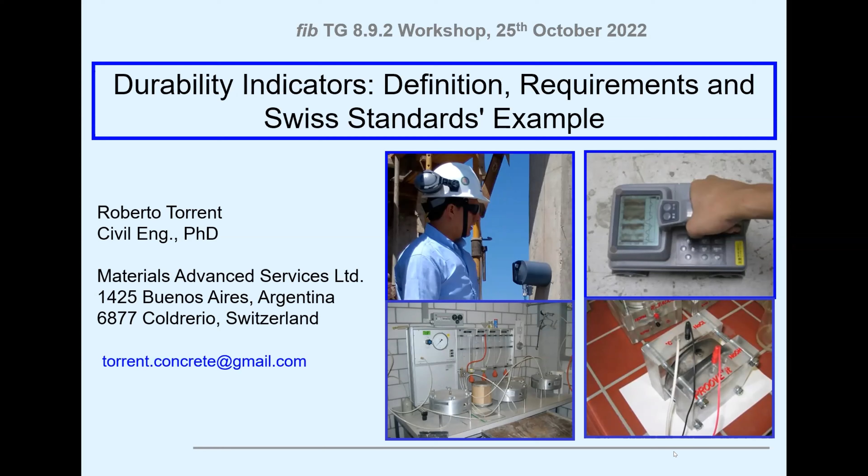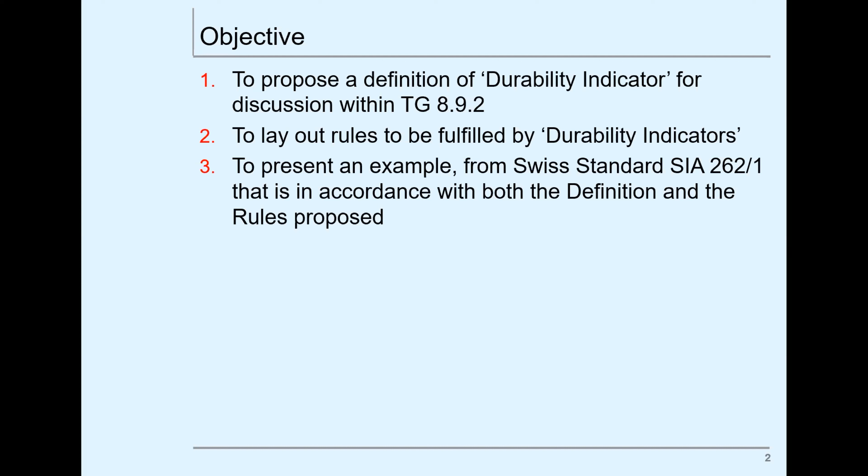The objective of the presentation is to propose a definition of a durability indicator that would be a contribution for discussion within the committee. Also, to establish some rules to be fulfilled by durability indicators, particularly where they are considered as performance indicators. And then I will show the example of the Swiss standard that, somehow by chance, complies with these rules that I mentioned.

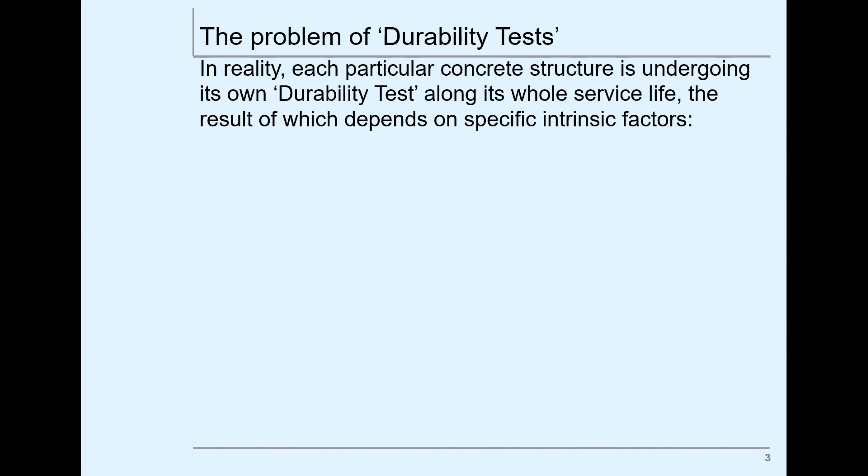I will jump this first slide because we all know that each structure is running its own durability test live during its service life, and there are many factors that affect the performance of the structure. So the conclusion we can all agree on, I think, is that it is unlikely or impossible to get a durability test that condenses all these factors.

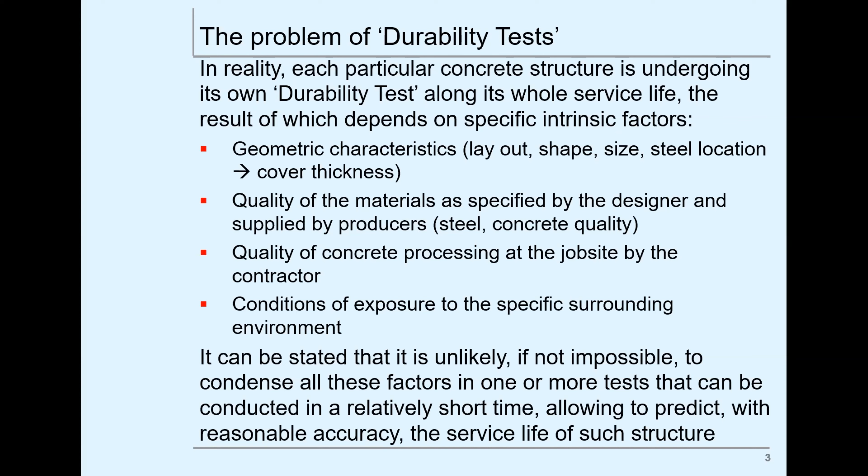But we also know that for degradation processes that depend on the penetration of aggressive agents like CO2, chlorides, and sulfate ions, etc., that have to penetrate through the surface layers of the concrete, it is generally accepted that tests measuring the penetrability of those layers are suitable as durability indicators for these particular mechanisms.

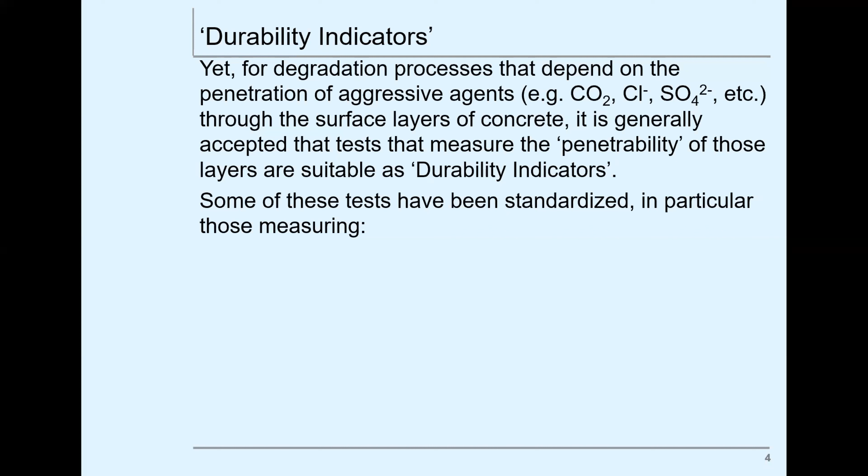We know that there are many tests that have been standardized, particularly those measuring permeability, water sorptivity, water penetration under pressure, gas permeability, and diffusion or migration - like chloride diffusion, chloride migration, electrical resistivity, gas diffusion, or carbonation rate, which includes not only diffusion but also chemical reactions.

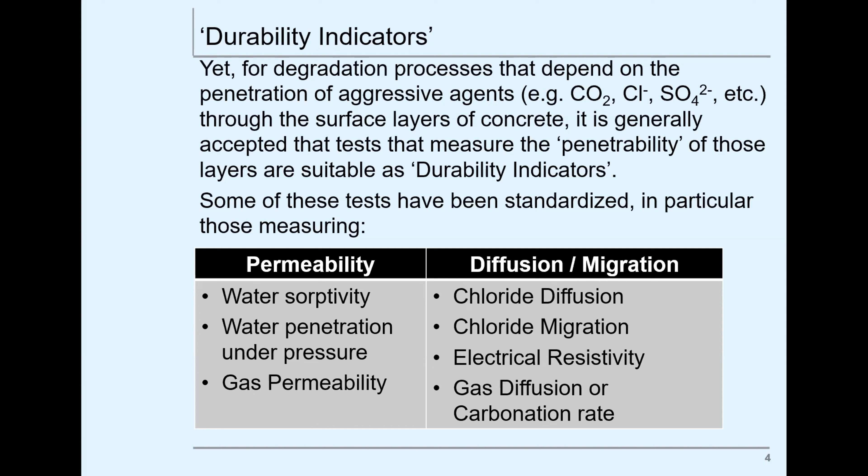Now I will try to advance - of course this has to be discussed deeply in the group - a definition of a durability indicator, thinking of these particular mechanisms. We can say that durability indicators are characteristics of the concrete structure, like the cover thickness, or of material properties of the concrete, that are essential to or bear a significant role in the service life of a structure under its specific exposure conditions.

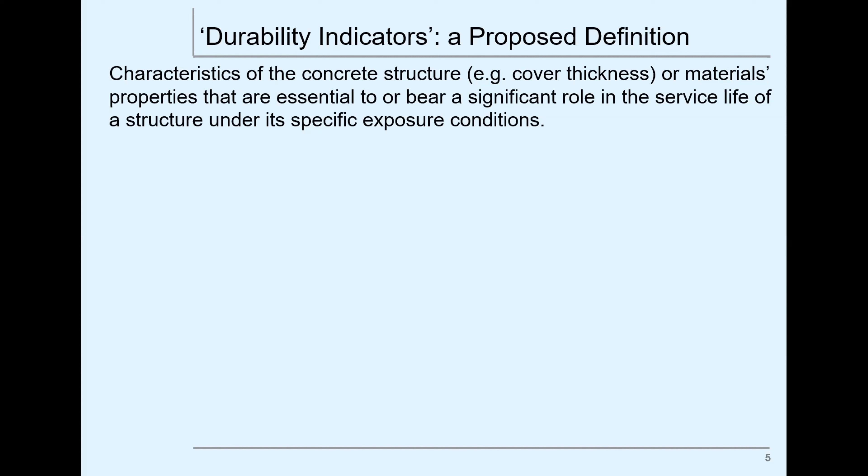Incidentally, this definition was coined during a meeting. I think Jost was present. I don't know, Carmen, if you were there. It was a meeting in Leipzig that was organized by Professor Dehn and Professor Beushausen, actually on a similar topic.

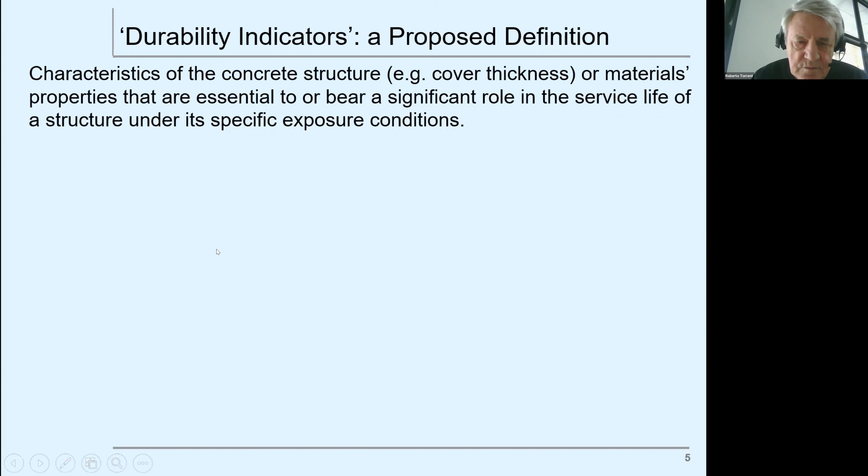We can say also that durability indicators should first be meaningful - that is, it should be closely connected with the relevant physical, chemical, and/or electrochemical deterioration mechanisms that govern the performance of the structure. Second, they must be measurable, preferably in a reasonably short time, through well-defined, standardized methods of test or analysis.

And third, it should allow conformity assessment with specified requirements based on tests conducted at suitable, well-defined sampling points - it could be the production plant, the delivery point of the concrete, the placement point, in situ on the finished structure, or in service if some years have passed since the structure was built.

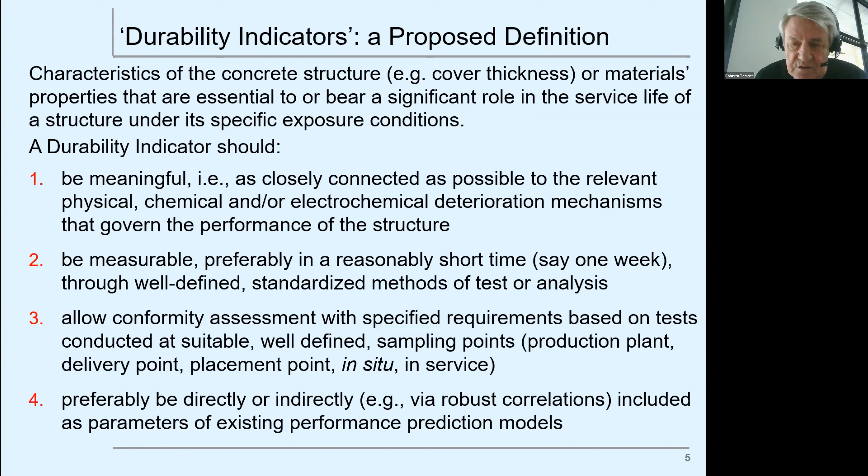And preferably be linked to some modeling, directly or indirectly, via robust correlations with other properties.

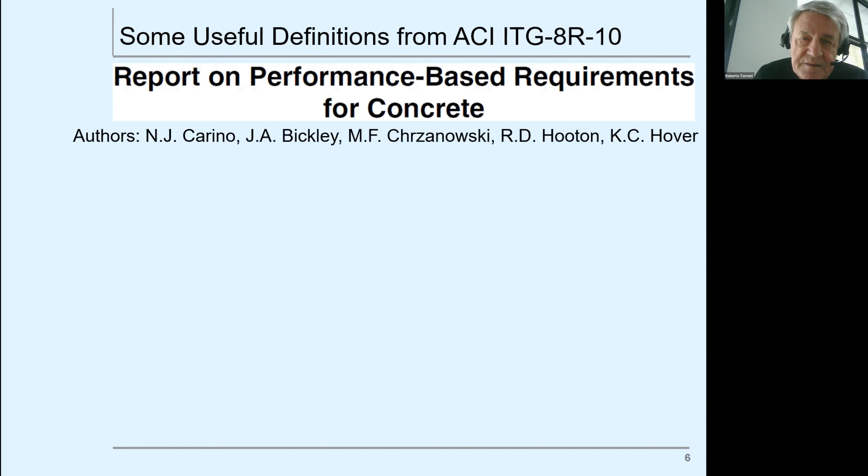Now I want to refer to a document which I find interesting for our work, which is a report on performance-based requirements for concrete. You know the authors, some names we know well, that provide some definitions, of which I took only a few.

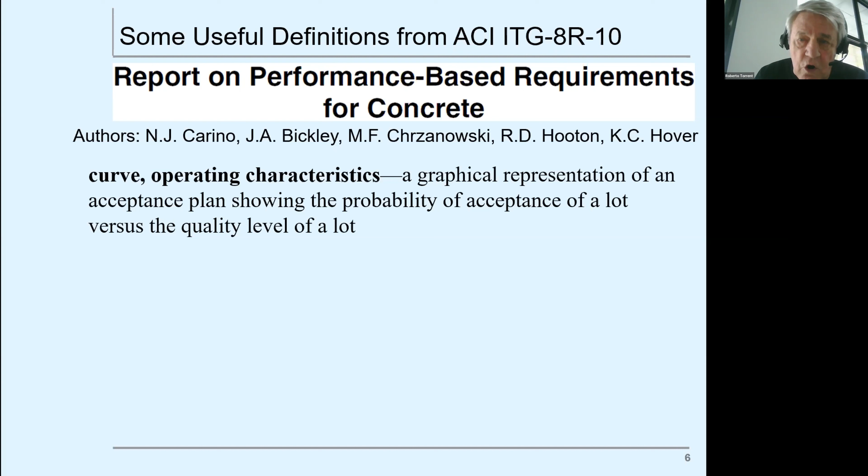One is the operating characteristic curve, which is a graphical representation of an acceptance plan showing the probability of acceptance of a lot versus the quality level of the lot. Then the definition of a lot: a definite quantity of a product or material accumulated under conditions that are considered uniform for sampling purposes. Penetrability - which I used before in the definition - is a general term related to the ease of fluid penetration into concrete, which may occur by permeation, absorption, and diffusion.

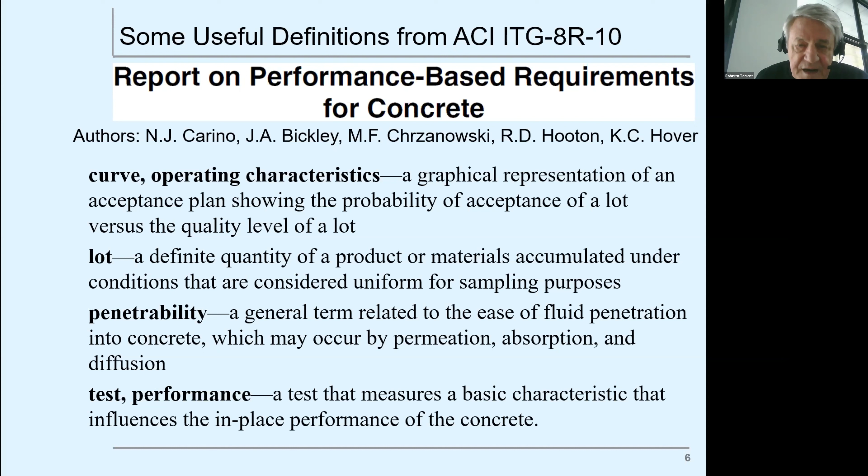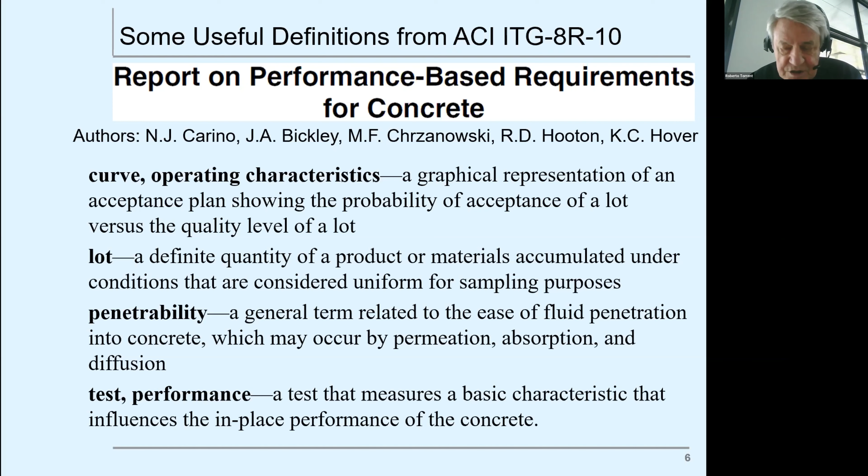And finally - I cannot read my own slide here, a test performance - well, you can read it. I can't actually, because there's some... well, but it's basically a test that measures a basic characteristic that is related to the on-site performance of the structure.

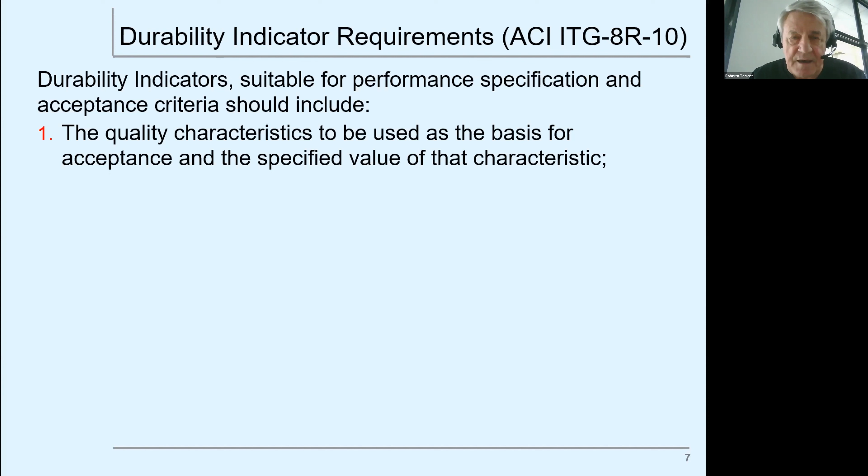Now this same document proposes a list of requirements for a durability indicator to be suitable as a performance indicator - that is, suitable for performance specification and acceptance criteria. And according to them, it should include first, the quality characteristics to be used as the basis for acceptance - what are we measuring, on which characteristic we base our acceptance procedure, and the specified value of the characteristic.

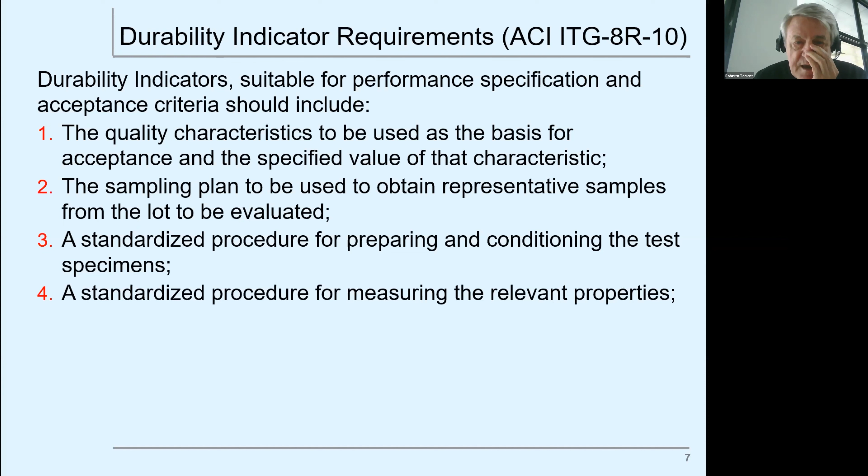Second, a sampling plan to use to obtain representative samples from the lot to be evaluated. Third, a standard procedure for preparing and conditioning the test specimens, a standardized procedure for measuring the relevant properties or characteristics, the criteria that will be used to evaluate whether the test results indicate an acceptable level of performance, including statistical methods, and finally, if applicable, some provisions for pay adjustments and actions to be taken in case of non-compliance.

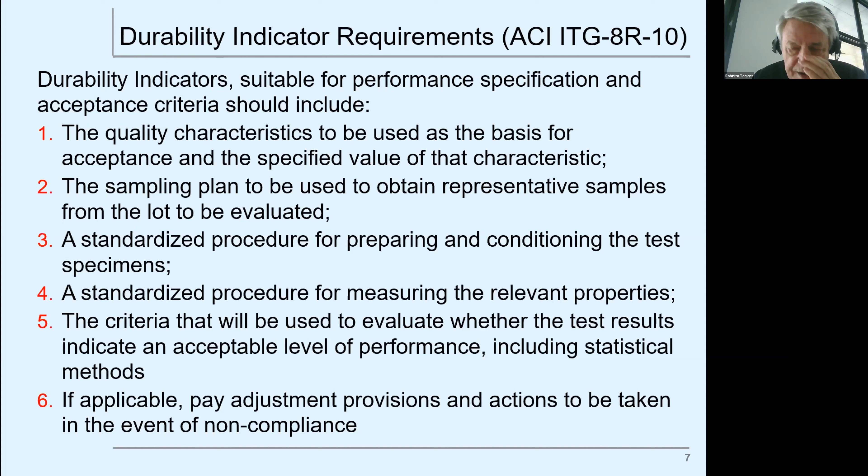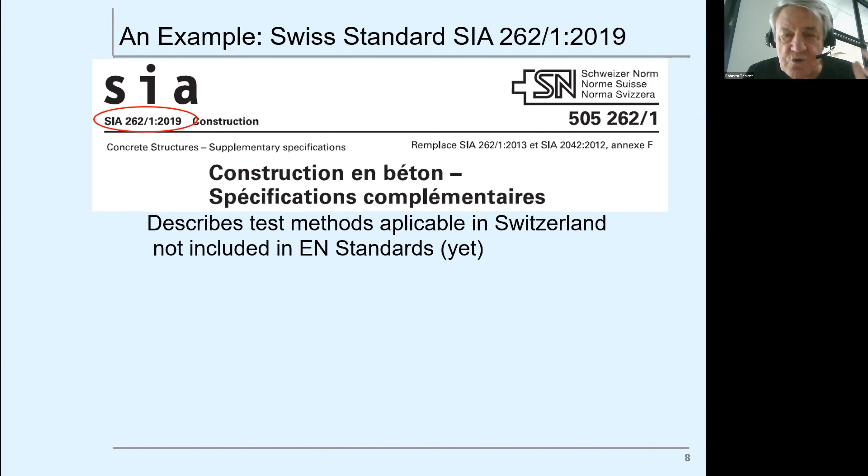Now I will show the Swiss standard, which I will compare with the provisions of this standard that you've probably heard from me several times. It is the Swiss standard called Concrete Structures Supplementary Specification, this is a French version. This standard describes test methods applicable in Switzerland, not included in the European standards yet.

For example, Annex A describes the water permeability test, Annex B the migration test for chlorides, Annex E the permeability to air on structures, and Annex I accelerated carbonation. The tests in Annex B and Annex I will probably be removed soon from this standard, because they are now included in the European standards.

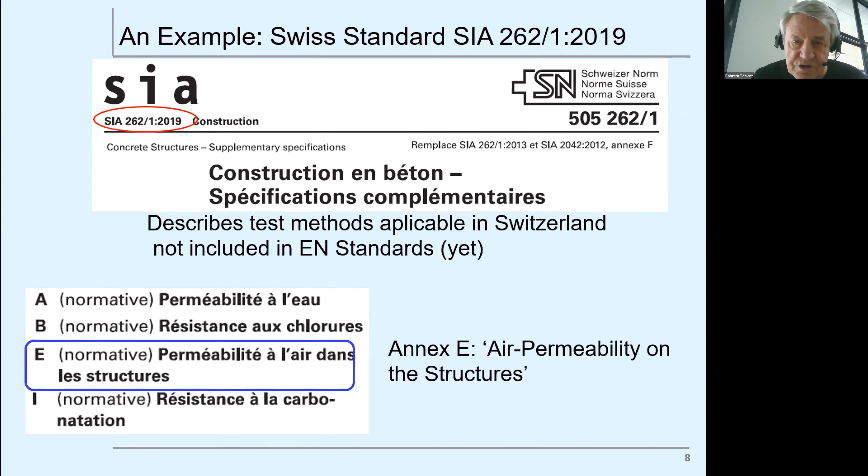So we will talk about air permeability on the structures. I will, in italics, copy the requirements of the ACI document and show how this is dealt with in the Swiss standard.

First, the quality characteristic to be used as the basis for acceptance and the specified value of that characteristic. The quality characteristic chosen is the coefficient of air permeability measured non-destructively on the end product, or in situ, the air permeability on the structures.

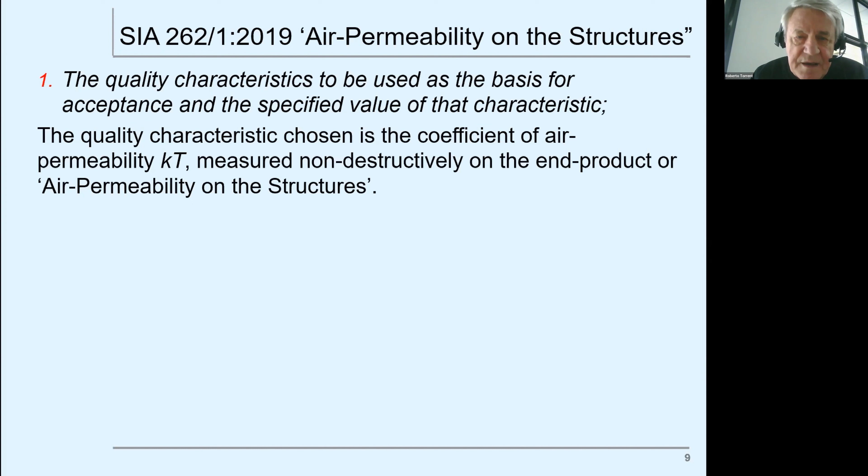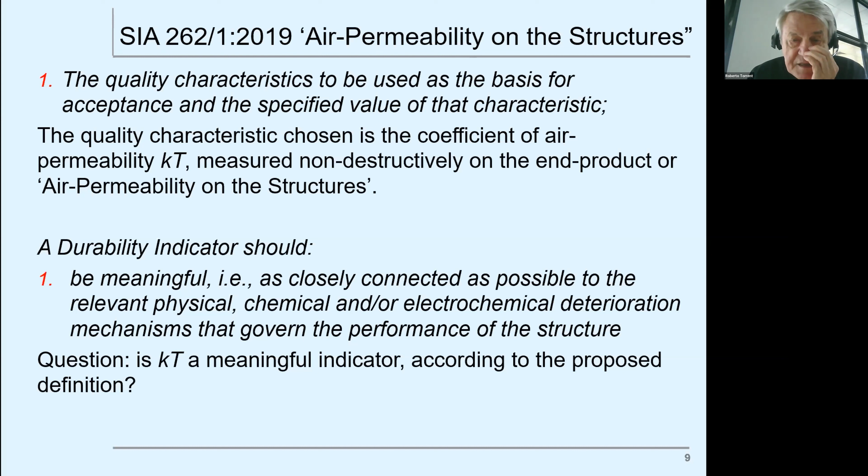I also bring part of the definition of the durability indicator that I showed before, proposing that this indicator should be meaningful, as closely connected as possible to the mechanisms of deterioration. The question is: is air permeability a meaningful indicator according to this definition?

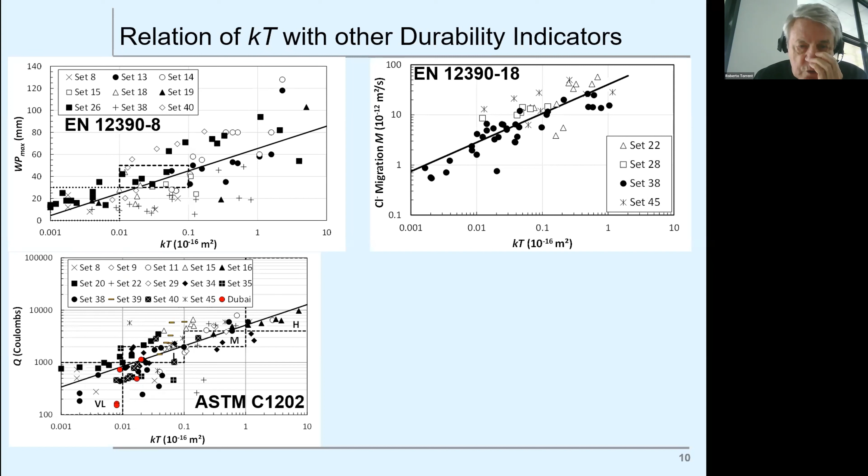We have shown that this air permeability is well correlated with water penetration under pressure. It's also well correlated with the chloride migration test of the new European standard, and reasonably well correlated to the Coulomb test, ASTM C1202. I have to mention that all these data are collected from the literature, except the red dots, measured not long ago in Dubai.

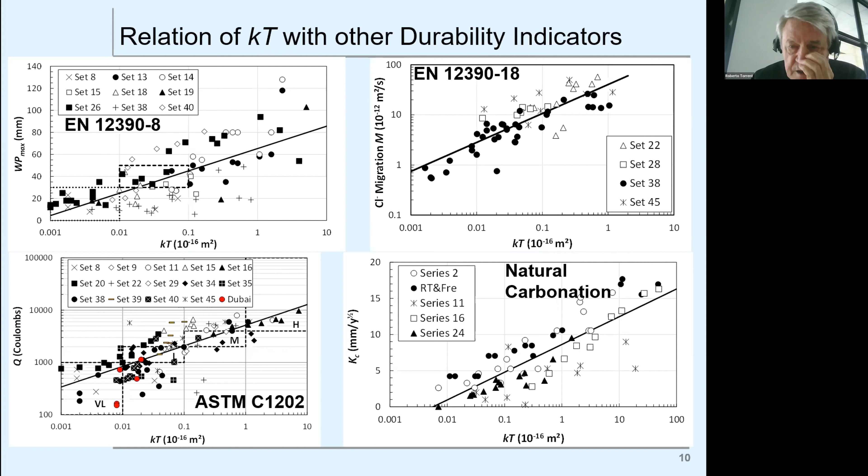Here there are some values in which I participated, shown as circles. The rest are from other sources. On the ordinates is the carbonation rate. There were different temperatures and moisture conditions across the different laboratories involved.

The ACI document says that specified values should be introduced. In the Swiss standard, this is indicated in the last row of the table, as a function of the exposure, with aggressiveness of exposure going from left to right.

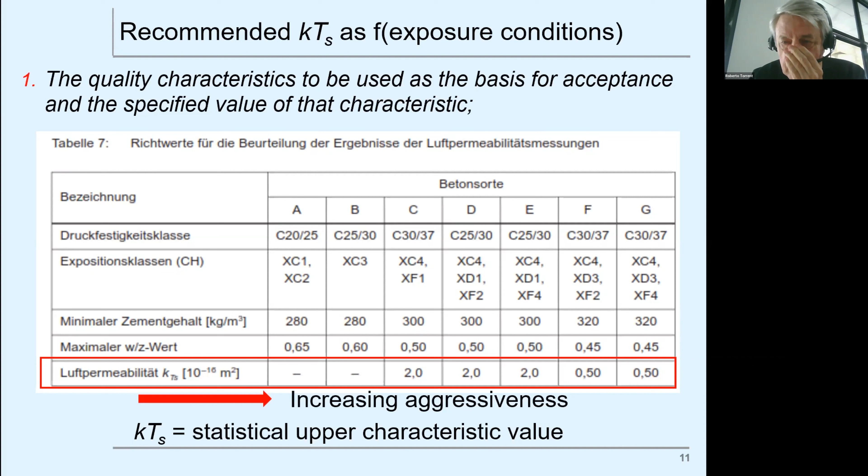So if you have XC mild carbonation, you don't need to measure it. But if you have, let's say, severe carbonation or mild chlorides or frost, then you get the value of 2. And if you have more severe chlorides or frost, the value is 0.5, times 10 to the minus 16 meters squared.

So you can see that this is in compliance.

Now the sampling plan to be used to obtain representative samples from the lot to be evaluated. The Swiss standard indicates that elements made with the same concrete type, built under nominally similar conditions of placement and compaction - for example, you separate columns from slabs or beams - and then within each group, you list the elements chronologically.

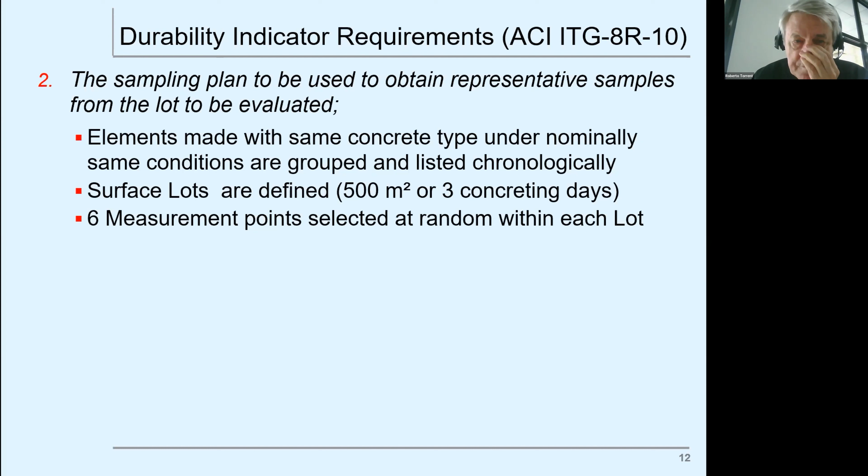A lot is defined as a surface of 500 meters squared, or 3 concreting days, whichever is less. Then you perform 6 measurements within each lot at random locations, with some limitations on the distance between tests to avoid interference. So this is also in compliance.

Now, a standardized procedure for preparing and conditioning the test specimens. In this case, as we are talking about the site test, there is no way of conditioning, or it has not been found yet. So the age of testing is defined.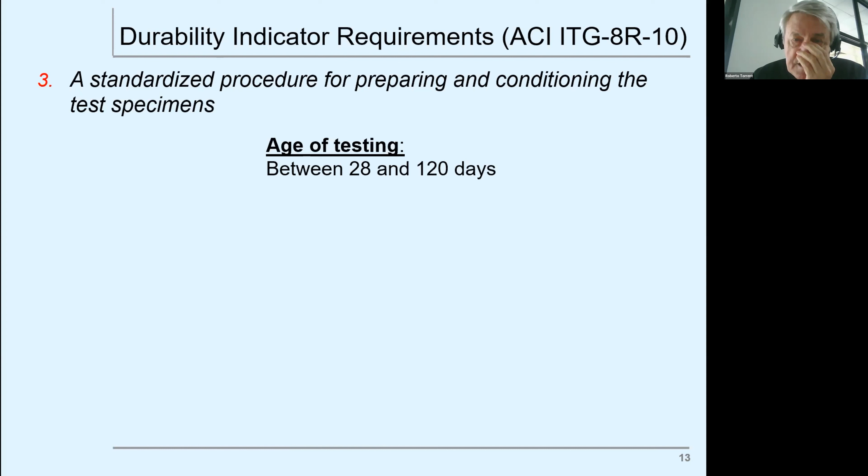The temperature of the concrete and the air should not be less than 5 degrees. Moisture, very important for this test, is measured by a contact impedance tester, which has to comply with the ASTM standard, less than 5.5%. Here you can see some of these instruments.

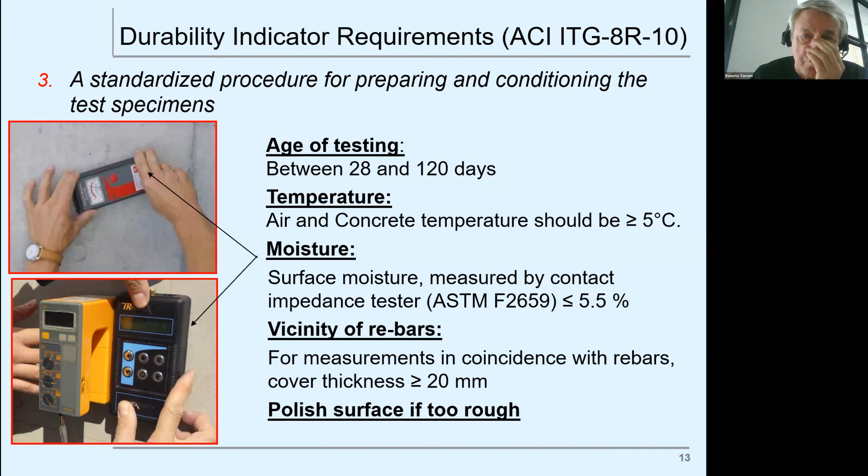Vicinity of rebars: if you measure in coincidence with rebars, the cover thickness should be at least 20 millimeters to avoid affecting the flow of air. And finally, if the surface is too rough, you have to polish it. So this covers preparing and conditioning the test specimens.

Then a standard procedure for measuring the relevant properties. This test method is described in detail, how you run the test, in the standard. So this is also in compliance.

Then the criteria used to evaluate whether test results indicate an acceptable level of performance, including statistical methods. The condition of the Swiss standard is that from the 6 tests made on a lot, not more than one should exceed the specified value. But there's a second condition.

If you have just 2 tests that exceed the specified value, you can select another 6 points at random from the same lot.

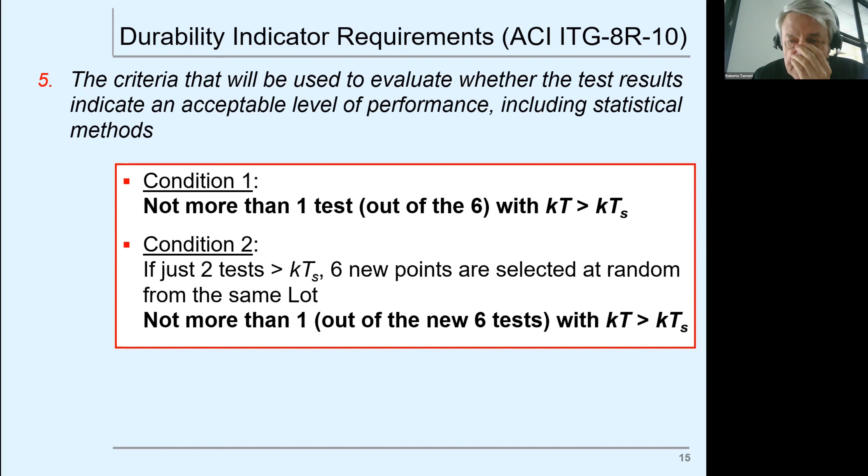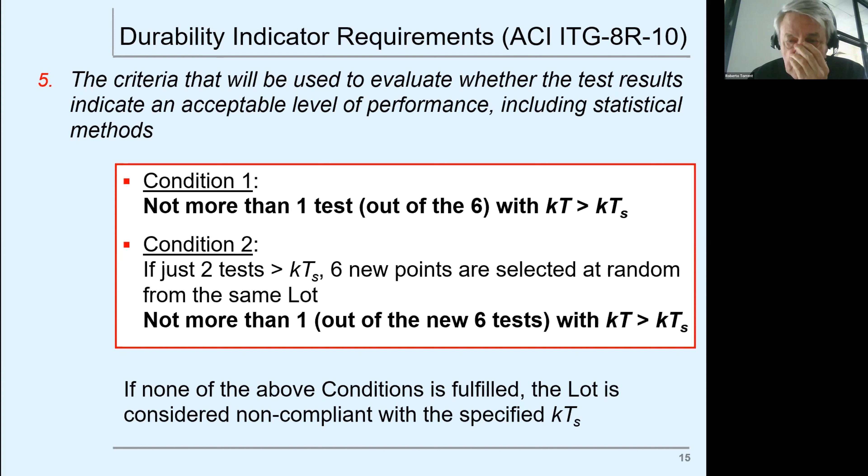And from this new series, again, not more than one test should exceed the specified value. If these conditions are not met, then the lot is considered not in compliance with the specified value of permeability.

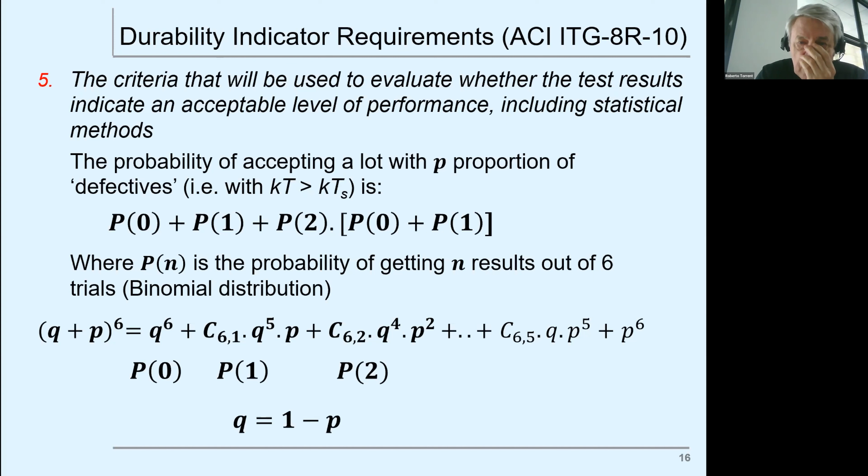I don't want to go into details, but we have statistical methods to calculate the probability of acceptance of a lot with a certain proportion of defectives, using the binomial distribution.

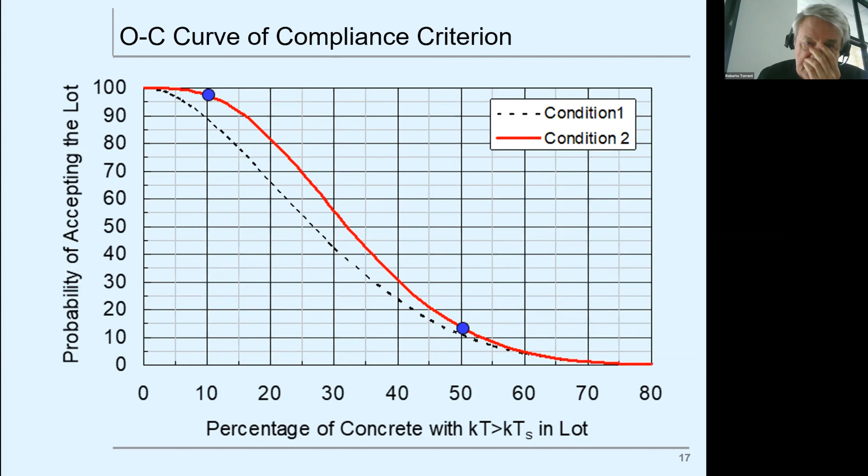What this chart shows as an example is that if 10% of the surface of your lot has a permeability higher than the specified value, the chance you accept this lot applying the compliance criterion is 97%. And if 50% of the lot is defective, the probability of accepting such a lot is only 13%. So this looks reasonable.

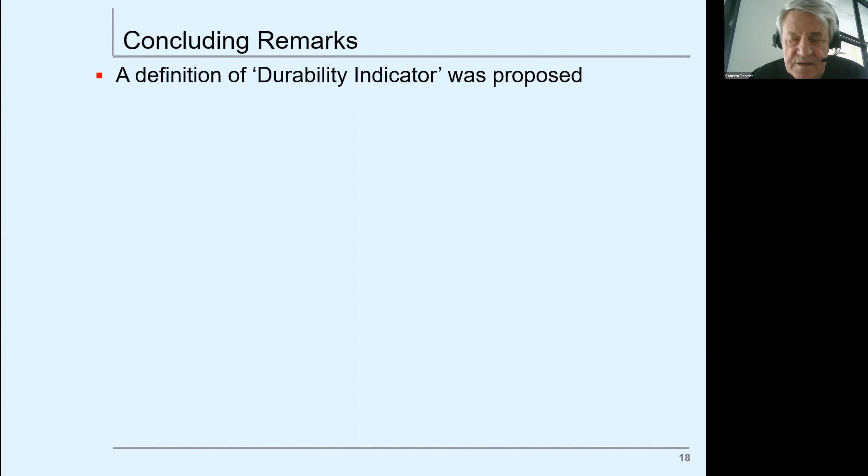So now I will conclude. In this presentation, a definition of the durability indicator has been proposed. Of course it can be improved, and this could be part of the work of this task group.

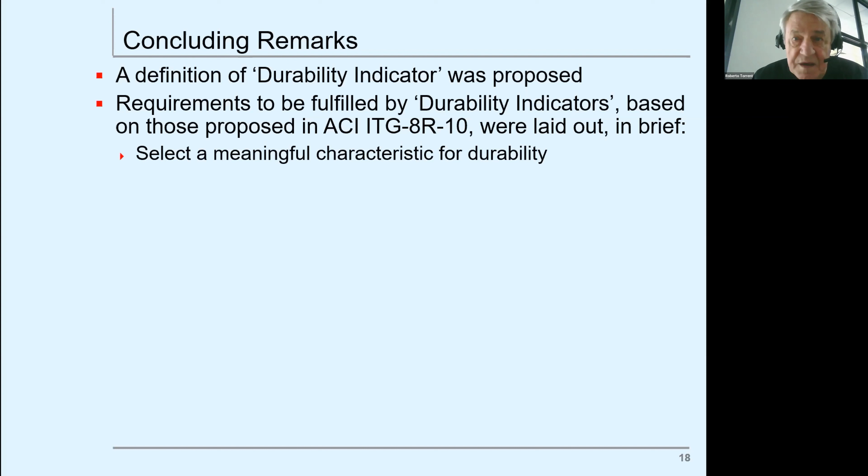Requirements to be fulfilled by durability indicators, based on those proposed in this ACI document, are as mentioned. Basically you have to select a meaningful characteristic for durability, as I said, could be cover thickness, or air permeability, as the case I showed before. Then you have to specify limiting values for the characteristic, which should be a function of the exposure.

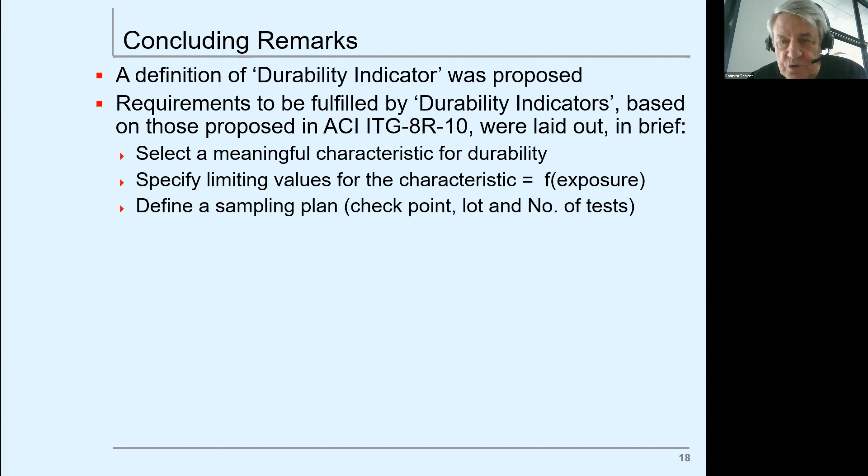You have to define a sampling plan: where you take the sample, the checkpoint, how you define a lot, and how many tests you conduct within this lot. Then you need a detailed standardized procedure on how to perform the measurements.

Then you have to establish conformity rules of the pass or not pass type, to decide whether the lot is in compliance with the specified limiting value. Then you have to elaborate a statistical analysis to demonstrate that the compliance criteria you are proposing is efficient in discriminating good and bad quality lots.

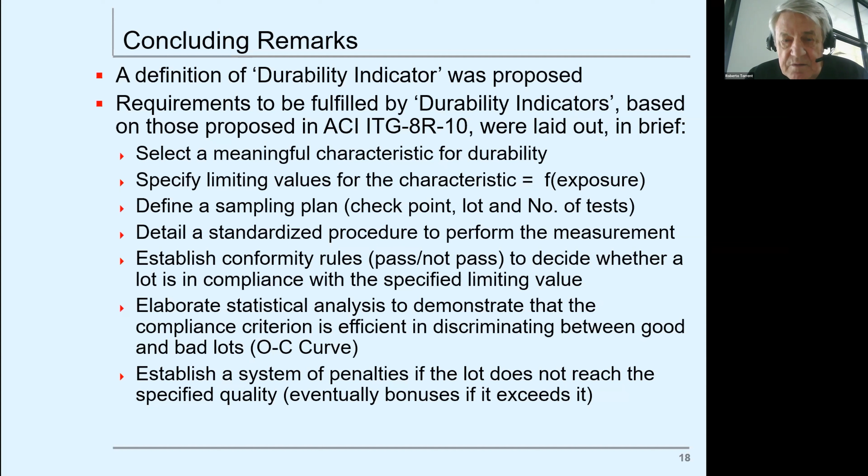And finally, this is not in the Swiss standard, you should establish a system of penalties if the lot does not reach the specified quality, and eventually some bonuses if it exceeds the quality significantly.

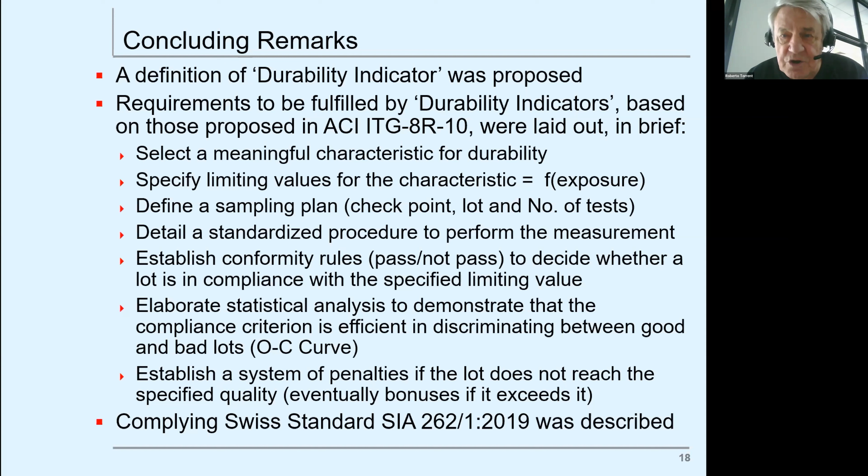Finally, I will show how this Swiss standard, accidentally, since this procedure was established in a document produced before this ACI document was published, fits quite well into this frame, by chance or because the criterion used was similar.

Well, this is all I wanted to share with you. There are some references for those who want more insight into the topic. Thank you very much.

I apologize for the conditions at which I had to give my speech. Thank you very much, Carmen, for inviting me.

Thank you, Roberto, for your effort to participate, because it's important to have the opinion of all who have a long track record on this topic of indicators.

I think for you there is a question from Kefe Lee, Roberto: Do you believe we can build up a set of in situ test indicators to determine the actual service life of concrete structures or structural concretes?

You can see it in the Q&A. Yes, if I understand, you ask whether we can build up a set of in situ test indicators to determine the actual service life. Well, I think in this case, when we want to associate the indicators with service life, we need to have some sort of modeling.

In which you associate the indicators directly, the model can have the indicators as input parameters, or the parameters of the model can be estimated from the indicator. For example, I showed some correlations that could be used this way.

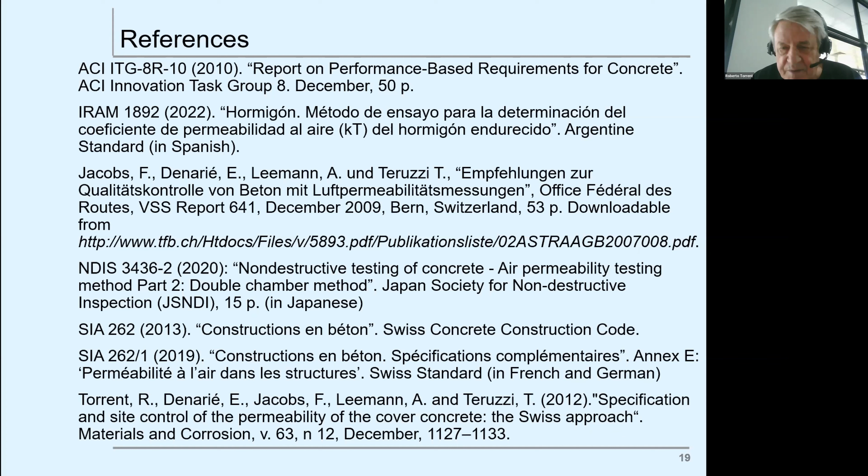I think this is probably the answer, but I don't know if I fully answered the question. Also privately, it would be a pleasure to discuss further.